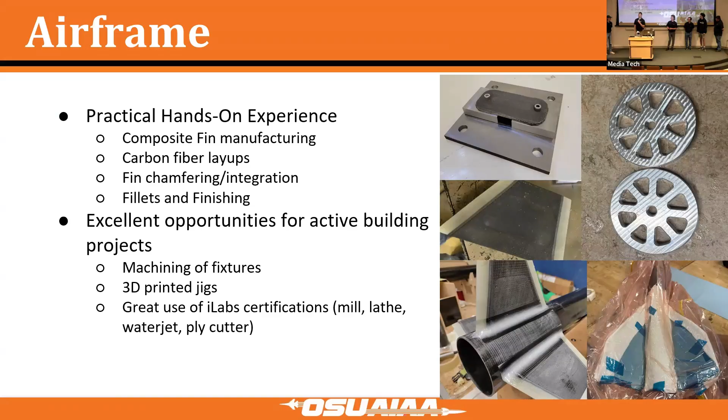Who's next - Design, Build, Fly? Perfect, all right. Our next team is Design, Build, Fly. This team focuses more on an airplane rather than a rocket.

The goal of this project is to develop an RC aircraft and fly it in an international design competition with a bunch of other schools. We are competing to achieve a certain set of objectives set forth by AIAA, the host of this competition. This year, the challenge involves creating an aircraft that can autonomously fly around a course and complete certain objectives.

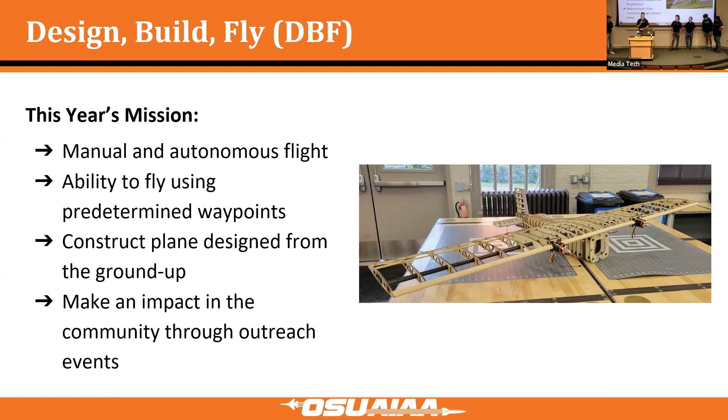The design features a mothership, which is the plane that you see here. This plane has to fly in kind of an Olympic track shaped oval. It has to do this three times and then complete a series of smaller loops. It's kind of hard to explain, but this mothership has to fly that pattern.

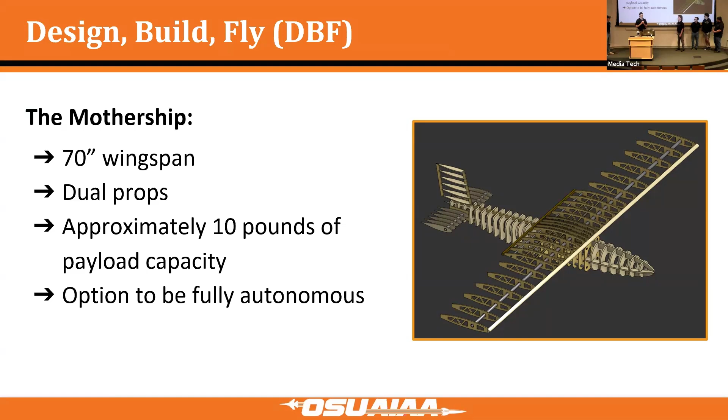Underneath it, sitting right under here, there's a mini glider - so it's a plane that deploys a glider. The plane that you see there is manually flown, but the glider has to be autonomously flown. The glider will detach from the plane and autonomously fly a predetermined route and then land on its own, and you have to land in a very specific area to get points and increase your score. I think it's a really awesome concept this year.

I think we had a video here, but it won't be playing, but you can come see afterwards. They have a video of the little glider thing autonomously landing by itself, which I thought was really cool.

All the components for this are made in-house. We use balsa wood and we design and cut the parts on a laser cutter. Then we integrate electronics into that, and then we program the plane from there. So there's a lot of manual flying that takes place because we have to train the flight computers to be able to fly the plane autonomously.

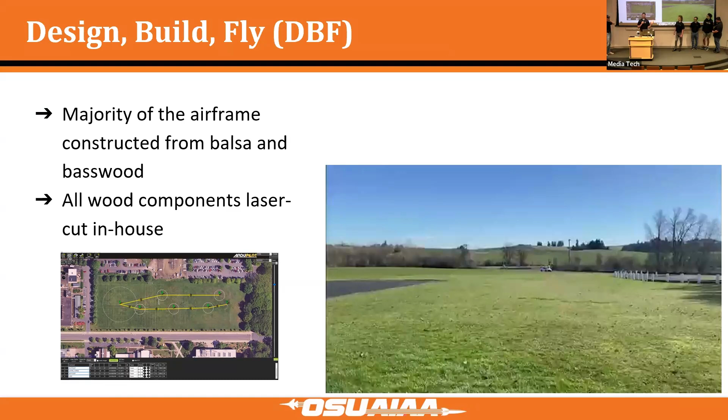I don't think they use cameras to see, but I think they use LiDAR or something like that. I'm not on the team, but they use something to be able to know where the little glider thing is. So I think that's pretty cool, but that's DBF.

Next up is the agricultural drone team. This is a really cool project. This team is also developing something that's autonomous. This drone is being developed in partnership with Raitong Organics Farm, a farm in Thailand, and the whole purpose of this project is to design a farming drone that can go out in the fields just by itself autonomously and farm. I believe it has a payload on it that is capable of carrying liquid, so it can be fertilizer, it can be water, whatever. But you can go to the next slide here.

A big part of this is making the drone repairable using off-the-shelf parts, because if you think about a farmer in a remote part of Thailand, if something on this drone breaks, they're not going to just be able to go manufacture a replacement part. They're going to have to order it online. So you have to design this drone using things that you can find online. That's a very big challenge.

Additionally, a big challenge that they haven't had time to focus on this year is how do you make all the components waterproof, because it's very rainy in this area. And additionally, the farmer is probably not going to be very technically inclined, so how do you make the user interface of the drone very friendly, so anybody can learn how to use it very simply? So these are some of the challenges the team has been faced with this year. In my opinion, I think this is one of the coolest teams that we have. But that's me. Next up, we'll pass it on to HALE.

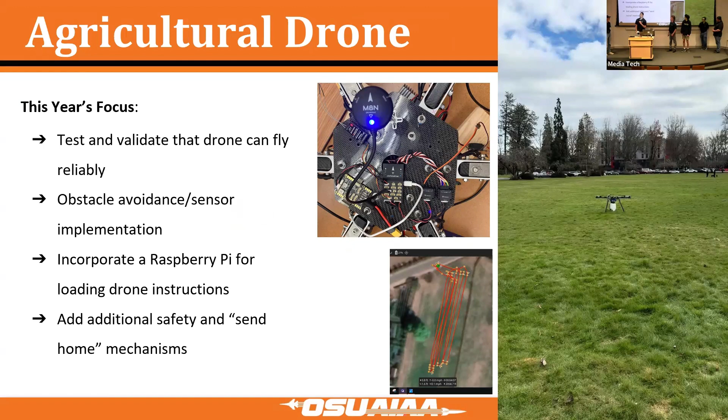Yeah, I'll take that. Okay, cool. Our video doesn't work. Dang.

Okay, so HALE is the high altitude liquid engine team. The other rocket teams you'll see during this presentation are solid rockets. What that means is the actual motor they use is a fuel grain that is like a solid mix inside that contains the propellant and oxidizer. They're both propellants, but the fuel and oxidizer are in one sort of dried compressed grain. We use liquid propellants, so this is what the Falcon rocket, the Saturn V, or big orbital class rockets use. We are a Kerolox system, that is kerosene and liquid oxygen. So we're also running cryogenic propellants, things that are causing all kinds of problems for us, but that's sort of our bag.

And so we're a little bit slower than some of these other teams. We're a sort of long-term, iterative, constant march towards getting to our ultimate goal, which is the Kármán line. That's at about 100,000, or it's about 100 kilometers. It's sort of the beginning of space for aerospace people.

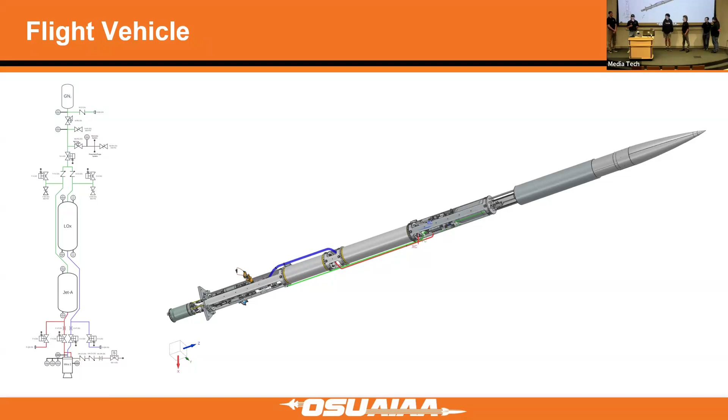Our team is not only developing our flight vehicle, but we're also developing our own ground control systems so we can enable the launch of this flight vehicle. There are two parts to this system.

When developing our engine, we have to isolate it, because propulsion research is the most important part of getting the rocket off the ground, can we actually produce thrust downward so we can go up. On the left is our horizontal test stand, a bunch of data acquisition, plumbing, and tanks that allow us to put just our engine on the stand and run controlled tests where we can light it, fire it, and characterize the engine.

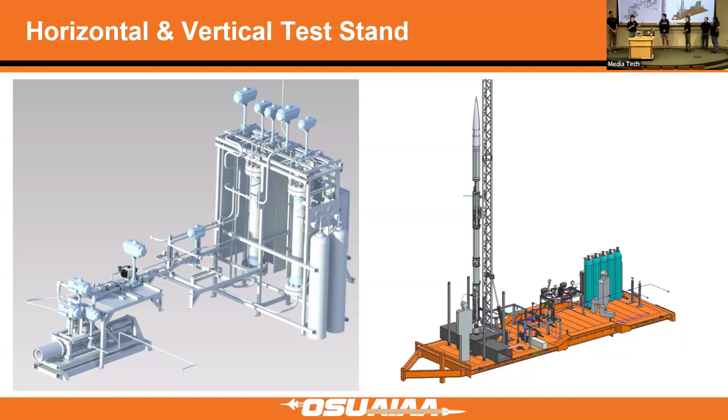For a full-scale launch with our flight vehicle, on the right is our vertical test stand, a massive 30-foot by 10-foot trailer. We take all the components from the horizontal test stand and put them on there. On top we can facilitate a large launch rail, about 50 or 60 feet, which is absolutely huge. We put our rocket on it, run the same tests, then light it and take it off, which is pretty fun.

We have some pretty cool videos of our hot fires. This is probably the most exciting part of the team, watching an engine fire. There's no experience quite like it. It's very loud, it's very bright.

Our second generation engine is our flight-capable engine that we'll actually be putting on our rocket. We fired it recently, about 3 months ago, for our first test, and we fired it at night. This is the firing video we can show you if you come outside.

And then just recently... well, I guess the video doesn't load. We also have a second static fire of that engine that's not shown here. Next slide. Oh, I see, okay, wonderful.

The main difference between these two firings is that the first one was the first time we ever fired the second generation engine. Fun fact: this engine is the second college-developed bipropellant liquid rocket engine ever developed in the state of Oregon, and the first was also ours.

Our first generation engine, we brought it along with us today, so if you're interested, we have it with us. It's pretty cool. This second video was the second firing.

As he set up for me, we designed Mira 1 and Mira 2, our two engines. Mira 1 you can go out and see, it's really big and bulky, weighs like 50 pounds, stainless steel. We mainly built that so we could get something in the stand and start characterizing and building up the infrastructure around running our engines. But it's difficult to integrate an engine like that into a flight vehicle.

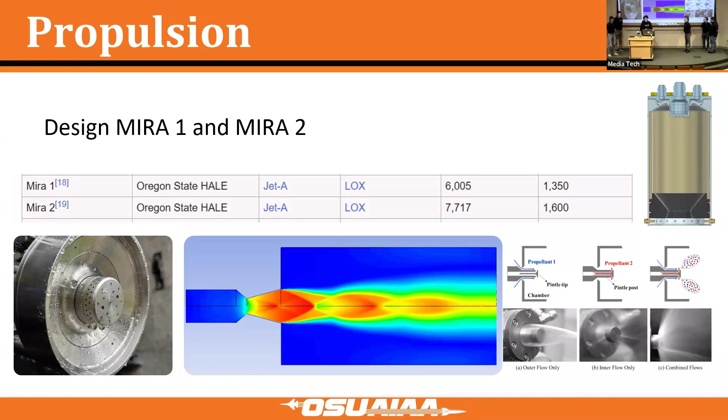These are Mach diamonds. So when you get supersonic flow, there's all kinds of weird things that occur. But yes, that's propulsion.

So in addition to the propulsion team, which is sort of our main driving force since the whole thing is we're doing liquid rocketry, if we actually want to put an engine together and send it up to the sky, we have to have a bunch of other sub-teams building a bunch of other infrastructure. We have 5 other sub-teams on the team, and we're going to run through these real quick so we don't burn too much time.

First up is our vertical test stand, which I already talked a little bit about. That's going to be our 30-foot by 10-foot launch trailer. We're actually going to drive this thing down I-5 all the way to the Mojave Desert east of LA. The main purpose of this is to facilitate the fueling, launch, and safe launch procedures of our flight vehicle when we actually put it on. The main work that goes into this is a lot of machining, manufacturing, and fluids work. We have to understand how we get a fluid from point A to point B, how we do that safely, and then, as I'll talk about with avionics in a sec, how we know if we're doing it safely using data acquisition systems, sensors, and such, as well as for the final launch in the Mojave Desert.

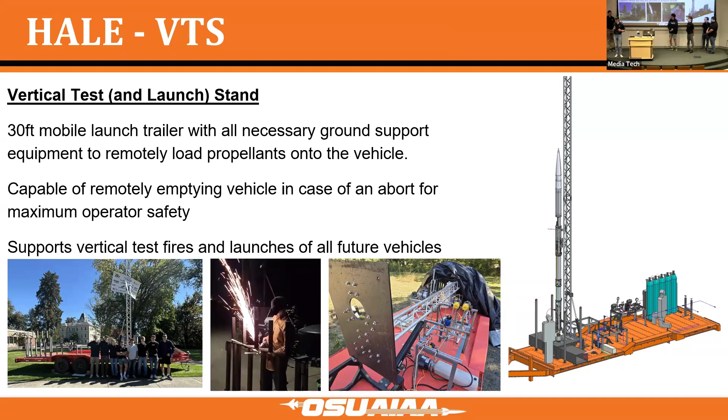Before we go all the way out there and cross our fingers and send it up, we're going to do a lot of tests. We're engineers, so we have to make sure it works before we actually get there. That's where the vertical test stand comes in, that's why we don't just call it a mobile launch trailer. This facilitates a lot of tests, both pressure, fluids, electronics, and of the engine before we ever get down there to a launch, so we can validate that system.

Another thing that comes with having those liquid energetic fluids is we need to have basically a whole fluids team in the actual vehicle to deliver all these things to where they need to go. So in between that pressurant tank and the engine, there's a liquid oxygen tank and a fuel tank. All of those tanks need to have valves and releases and escapes, so that anytime there might be a failure in the system, we can either vent it to a safe area or prevent a catastrophic destruction of the whole system, because there are areas that can see very, very high pressures and areas that need to see much lower pressures.

And then add on top of that, all of these systems being actuated are all pneumatics. So we're also driving all of the opening and closing of the valves with that same pressure that we're using to press all of the fluids through the system. So you sort of get into a chicken and egg, where you need the pressure in order to get all the valves open to get the rocket going, which you need for all of your valves and systems to be running and all your data to be collecting, but that's what we do.

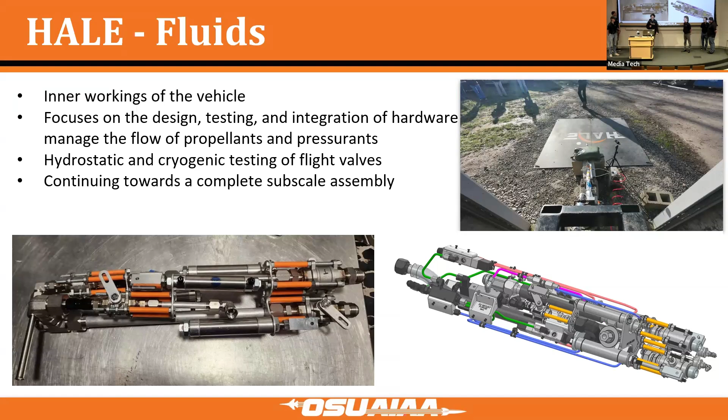And so that's sort of what fluids is: getting all those inner workings and cryogenic handling issues through a bunch of valves and tap offs and things.

And structures, very similar to the other rocket teams with a few key differences. You can see our bulkheads are a little bit bigger, a little bit beefier. We're carrying these big heavy tanks, and we have a big heavy rocket, and we make up for that with a very strong, powerful engine.

But so these are like a bunch of intersections. There's a bunch of things for a V-bay, and our design has carbon fiber flight skin, but the actual structure is mostly aluminum. And so we're sort of building it a little bit robustly and heavy the first time and just trying to get something off the ground.

Liquid's very difficult. There haven't even been that many launches in the whole US in liquids. So that's sort of a little bit safer of a design philosophy there.

But still, we have a lot of interesting things going on. We have to worry a lot more about accessibility. So when the actual rocket is stacked, being able to mess around with all of those valves and fittings and make sure everything is sealed up is of key importance, because if you have one leak in the system, that can be really bad. And when you have hundreds of connections in the system, you're going to have some leaks.

So we have these big channels and areas cut out of the structure so that we can potentially get in there and eventually fix and mess with things, because it's not always going to be that everything turns on and seals the first time. So a few other little things like that, but some other considerations.

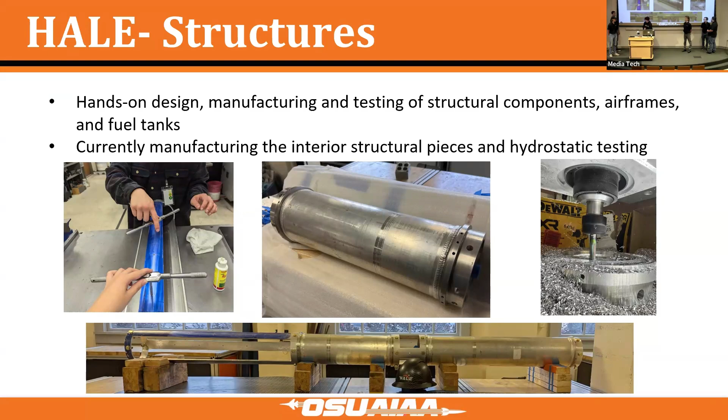We need to do a dual deploy. Essentially, if you deployed our big, huge parachute up at the altitude where we would want to deploy it, we would drift really far. And so we need to have a little teeny tiny parachute that starts first so that we're falling much quicker, and then the larger parachute deploys.

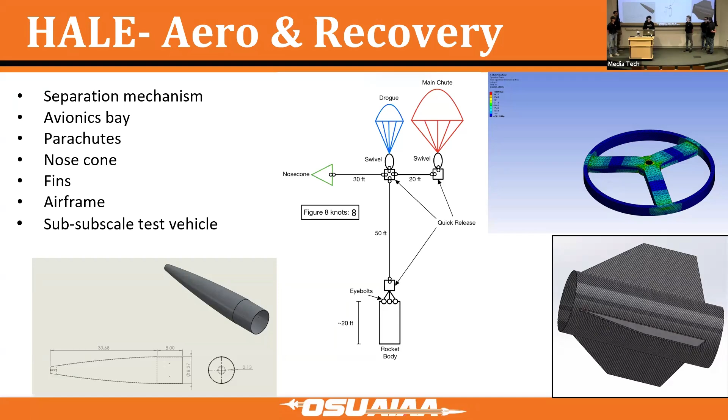So for dual deploy, we have to reuse the high pressure gas in another place. They typically use a pyrotechnic charge to separate and kick things off. We actually have that high pressure gas tap off into a little piston, and the piston punches off the nose cone. So some other considerations around that, and the fin can layup is mostly the same thing. We've combined a lot of that.

And then avionics. All right, and so this is the final sub team. This is the work I do. So if anyone's interested in electronics, I love talking about this stuff. I'll make this quick because we're running a little long.

So avionics is all about doing the data acquisition and control of the rocket. We cannot stand next to this and turn all the knobs and look at all the gauges and feel good about our safety because we're next to very high pressure fluids and very dangerous and explosive fluids. So when we have to launch a rocket, at minimum, we're going to be 400 feet away in a subterranean bunker, just barely looking through some very thick plexiglass with some ballistic covers over on top of us.

So avionics is all about tapping the pressure and temperature off the system, as well as actuating solenoids and doing real world error checking with limit switches to know whether or not that solenoid turned to open or close a valve. So what I mean by that is there's a lever arm on that valve that's going to move physically, and we have a little button right here and there to know if it actually made it there in the real world.

So we've had problems with that, and that's very important to make a safe system. Everything or most of everything we do is in-house design. We're a bunch of electrical, computer science and mechanical engineers, and we love this stuff. We try to design systems where we can, but we're not trying to reinvent the wheel.

Where we can take off-the-shelf solutions, we go for that. All of this work combined, we're hoping to launch our subscale vehicle this summer. It's a 20-foot rocket, which is crazy because it's our subscale rocket, and we're aiming for a 30,000 feet altitude. That's Hale. I'm going to pass it off back to Braden for APOP.

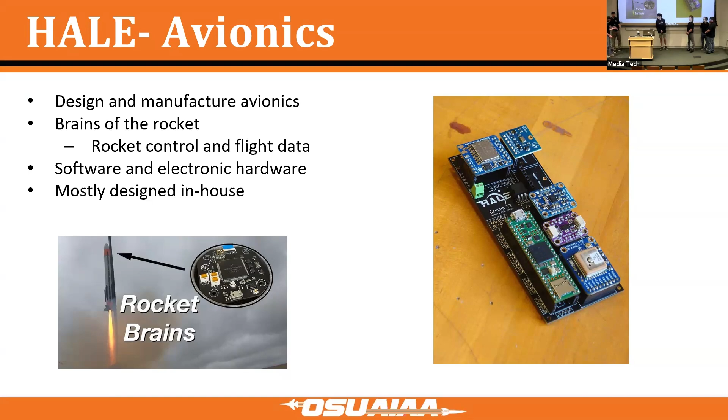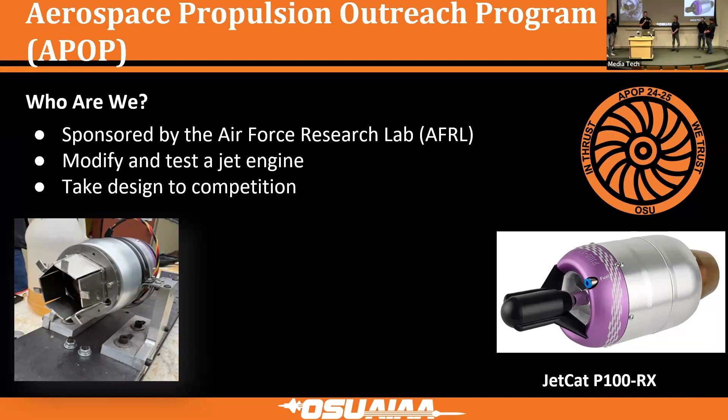So APOP is our Aerospace Propulsion Outreach Program team. This is a design competition, national, sponsored by the Air Force, in which the team is given a JetCat engine, you can see in the bottom right there, and they have to do something to it. So this year, the team is focused on creating a nozzle, which you can see a very preliminary draft of right here, that is capable of throttling to adjust the amount of thrust that the engine produces.

So you can see sort of iterations here. Over on the right is their initial design concept when it's closed, so that's when you would be generating the least amount of thrust. When you go over to the middle and the little flaps right here open up, you can throttle the thrust to produce more, and then you can actually see the fully prototype model right here.

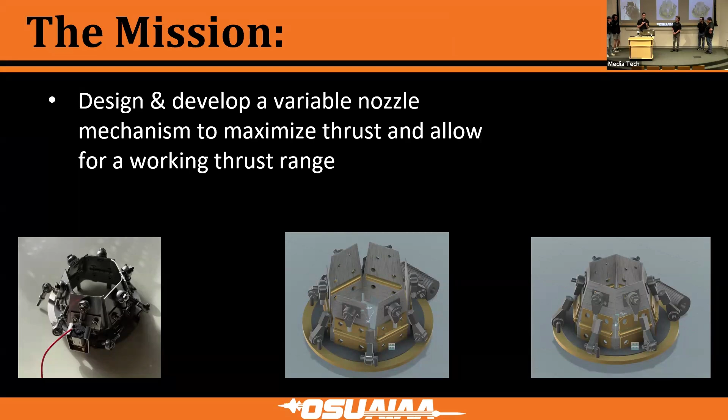So we go and we compete with a bunch of other schools at, I forget the name of the Air Force Base in Ohio, but that's where it is. And I forget the exact metrics, but I think you have to design this so that it can precisely throttle to about 80% of what the normal nominal thrust would be from the engine. So that's sort of the objectives there.

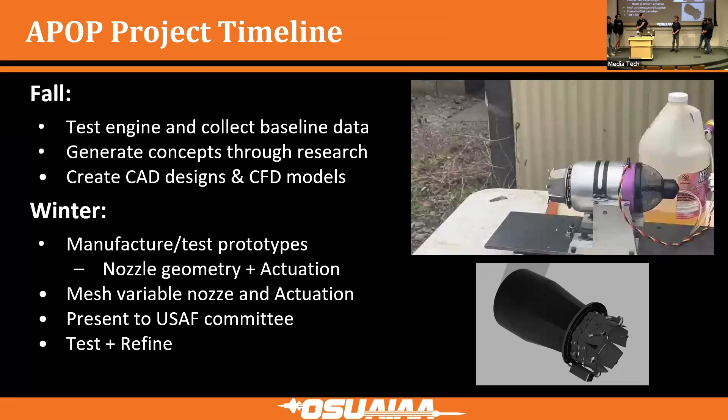We had a video to play, but you can see sort of what it looks like on the engine up there in the top right. Again, that's an early design though. And if you want to see the video of that thing working in action, you can come see it after.

Next up is our solar airplane team. This is a research team that is aiming to, oh wait, you want to talk about this? I can take it. Yeah, you talk about this. Okay. Yeah. He's actually on the team, so.

Yeah, so Solar Plane is our other plane team. We got two: DBF is the first, Solar Plane's the second. Whereas DBF is a competition team, Solar Plane is a research team.

And what they're researching is the idea of pseudo satellites. So right now, if we want to put something up in the air and keep it up there, we have to put it in low Earth orbit. And that takes a lot of energy, that takes rocket science, and that's very complicated and very hard, to be quite frank.

And so the solar plane concept is, what if we could launch a plane and it's light enough and efficient enough and it has solar panels on it that we could send it up and it'll be able to power and recharge itself theoretically infinitely. So now you don't have to use all this energy to put something in orbit, but you still have the same characteristics of something up in the air that you could use for anything like broadband or GPS, the same functions we use for satellites today.

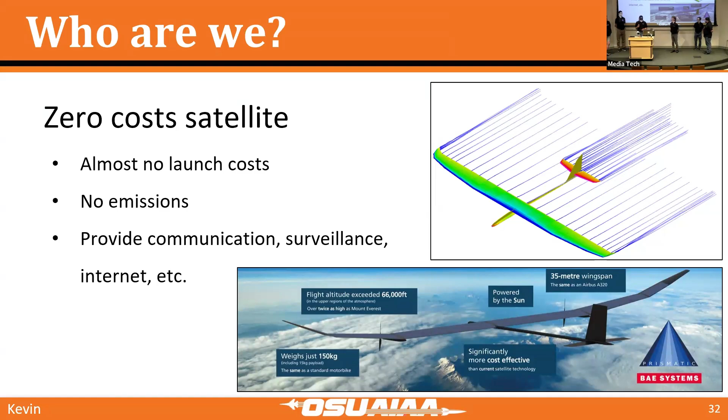The main objectives of this one: you're going to have almost no launch costs, no emissions, you can provide communication, surveillance, internet, etc. The team this year is taking an off-the-shelf RC glider, and they're upgrading it with all these solar panels and solar plane technology like electric motors in order to meet this goal.

So last year's team, they got a 2-hour flight time in with a single boom or a single fuselage. What I mean by that is, if we look here, this is just one fuselage of the plane. So this year, the team, they were experiencing a lot of wing bending problems where when they're producing all the lift across the wing, it starts creating this kind of V force on the wings, and it creates kind of like a snapping moment right in the middle.

And that's not very good as far as if you want to create a safe plane to put up. And so they're making 2 booms this time to sort of distribute that weight load and make it a lot safer.

On top of that, they are aiming to carry significant payload, about 10% of the airplane's mass, between these two booms. They actually just had their first flight, and it was a pretty cool flight. For the first flight, they put a camera on as their payload. We have that video and can show it to you if you come meet us in the lobby.

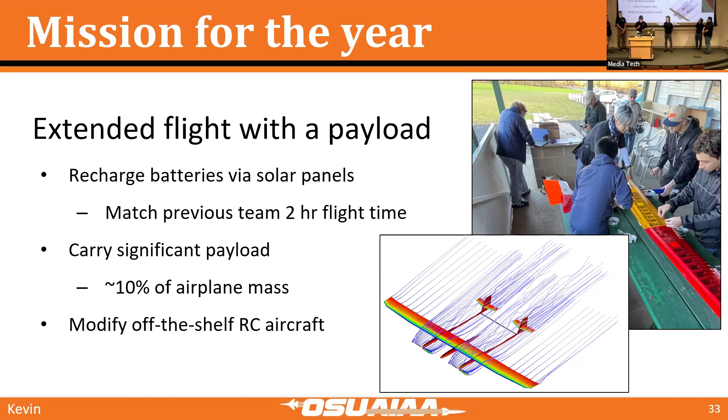It's pretty cool, we have a drone chasing it in this case. By the way, the scale of this thing, I think they're rocking about 12 feet. It's absolutely huge. So if we put it on this stage, it's gonna be very nearly reaching across this stage. The purpose behind that is, as you extend the length of an airplane's wing for the same width, you get a higher wing aspect ratio, which gives more efficient characteristics from the plane.

It's pretty cool. And pass it off back to Brayden.

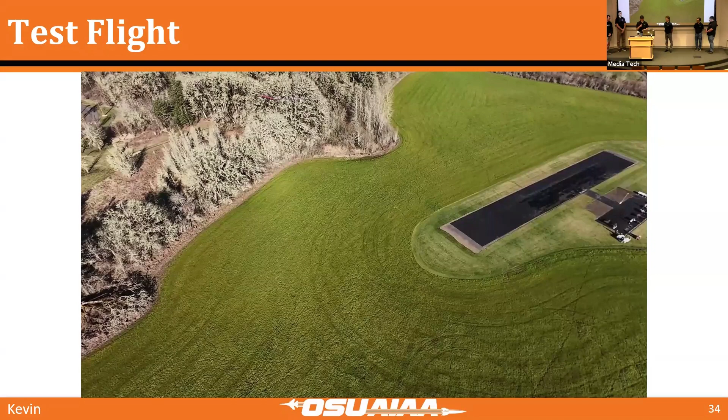Lastly is our student competition rocketry team, our 3rd rocketry team. We are again a solid team, and unique because unlike all the teams you've been hearing from, which are majority led by senior design capstone students, this team is primarily led by underclassmen volunteers. We are also a competition team, so we compete in an international design challenge with other schools down in New Mexico. We have a payload in this rocket, which we'll talk about soon. This rocket has the basic subsystems, structures, avionics, and recovery you've heard about from other teams, so we won't cover that, but we will cover the payload and an additional aspect that makes it unique.

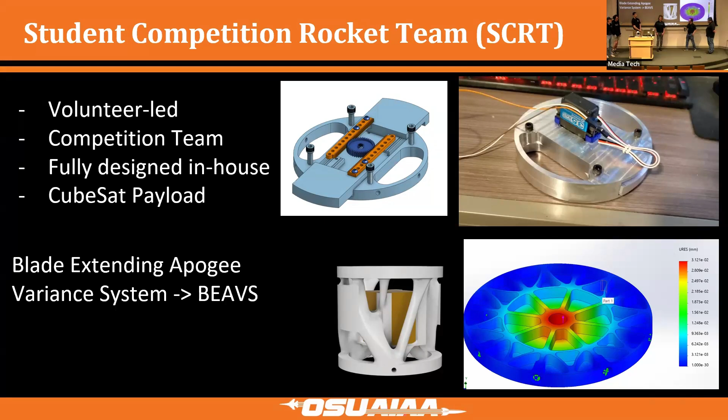Yeah, the video's up there playing. It's really cool in action, so you can come check it out afterwards.

The payload, on the other hand, is the Planetary Exploration Mapping and Data Analysis System, or PEMDAS. The goal of this is pretty cool. It's a CubeSat payload that replicates what you would send to a potentially habitable planet to determine its potential for human life. The idea is you send our rocket to a planet and deploy this payload, and on the way down, while the rocket is descending, the payload collects a lot of atmospheric data and data about the environment. There's a camera on it that takes pictures of the ground and uses photo meshing to determine optimal landing sites for future human crewed missions.

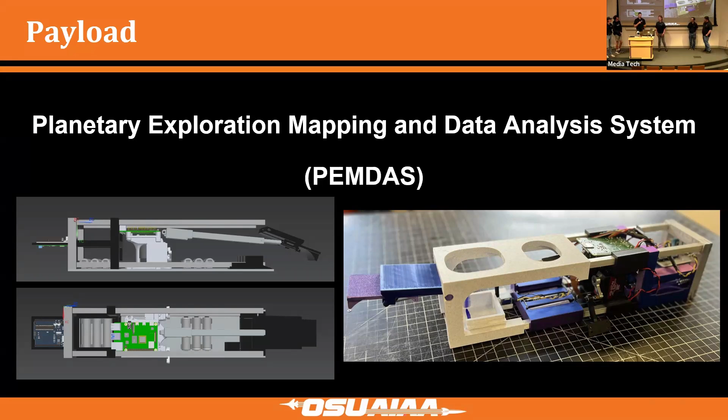Once the payload actually lands, there is a soil sampler, which you can see right here. It's got this little double door thing that'll open up and, like Hungry Hippo style, scoop dirt in, and then it will analyze that dirt. It will mix it with a water sample, and we can determine the material composition of the soil. There's a lot of really cool things this payload can do, and that's what makes our team unique.

Now, that's it for all the AIAA teams, that's all of our teams. I'll pass it on to Ryan now to talk a little bit about what he does. Okay, cool.

Or fusion propulsion, or trying to do something like a fusion. Oh, it's not on there. Do I have it? Yeah, there we go. It'll be on the next one.

Or fusion. That's sort of the environment that we inhabit, and so we have this umbrella within OSU. We do stuff with the College of Science and Engineering and some others, so we're basically developing advanced materials to exist in these plasma-rich environments. We're funded through some government programs, and that's that.

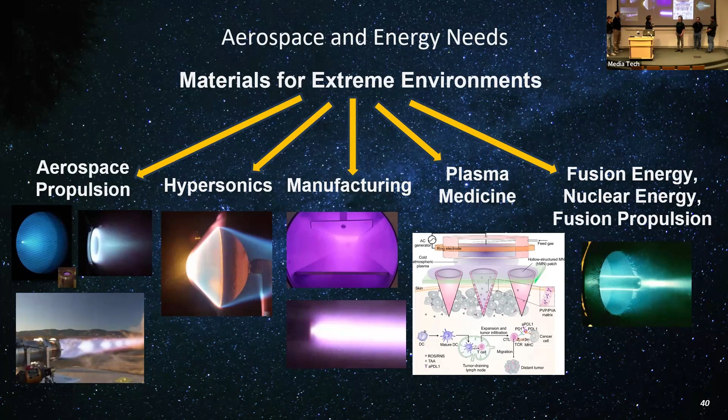We frequently make materials that survive temperatures at the surface of the sun. We're working on doing temperatures at the core of the sun. We are pretty crazy with what we build materials for.

So all of that is seated within these programs and capabilities that we have at OSU. We have advanced manufacturing techniques, and we make graded and tailored alloys, which is essentially making alloys out of all kinds of different exotic metals and ceramics, using additive manufacturing techniques like laser powder bed fusion, direct energy deposition, binder jet, and some other things.

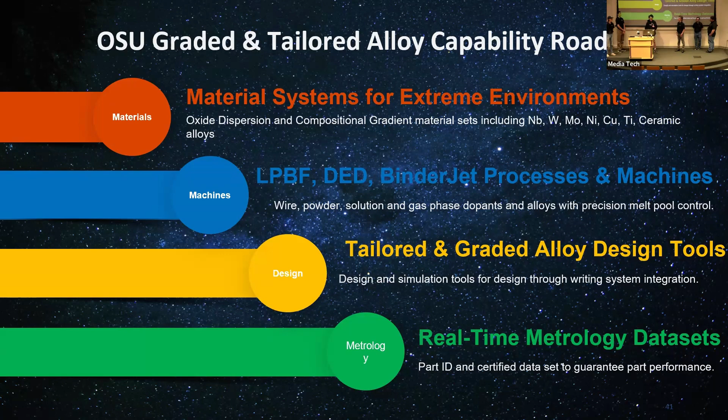We're close to the HP campus in ATAMI, so we utilize those resources. We're also developing tools, data sets, AI, and a lot of analysis for creating these new and exotic materials. That whole thing is AMMEA, Advanced Materials and Manufacturing for Energy and Aerospace.

We partner with businesses like HP and large aerospace providers, as well as academia and national laboratories, knitting all of those things together from their interests and experience to their resources, in order to make some of the craziest materials in the world, definitely in Oregon.

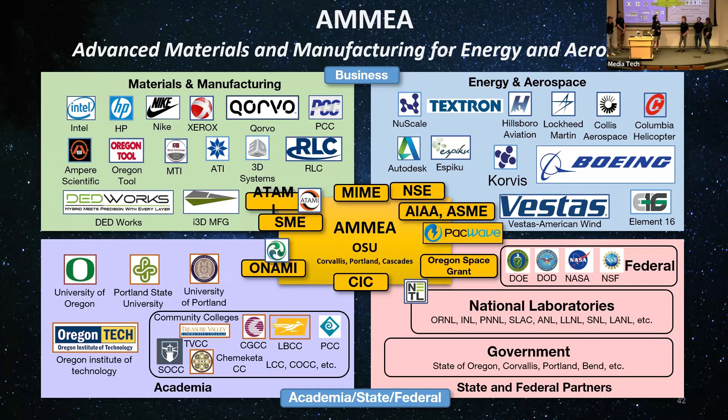We had a lot of older companies that were already in this area, so we have a lot of connections with people who made titaniums and castings and things. We have a lot of spin-out companies that have been developing that stuff, and that's not easy to just whip up out of nowhere. So for now and for the foreseeable future, we're going to have a pretty good advantage in materials that we're looking to exploit.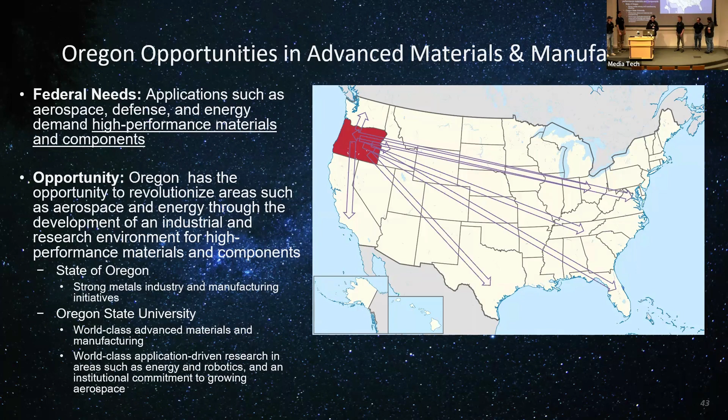Showing that OSU is doubling down on this, we are building a new laboratory: the Collaborative Aerospace Research Center at OSU within the Nancy Squires Aerospace Laboratory, which is actually where Hale and some of the other teams conduct their experiments.

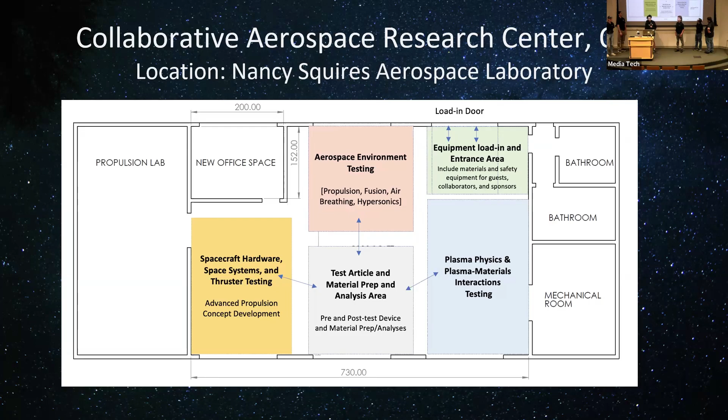This is just a little floor plan thing we have developed, and we have a couple nice photos showing what it might look like. These are all vacuum chambers.

We have to mimic the space environment when we are testing our advanced propulsion things. So you'd be like, how could you fire a rocket engine inside one of these things? Pretty much that's kind of what we're going with. Luckily, we don't have to deal with as much thrust — the advanced propulsion stuff that we make usually has thrust about like a sheet of paper, but it's like 10 times more fuel efficient than those engines.

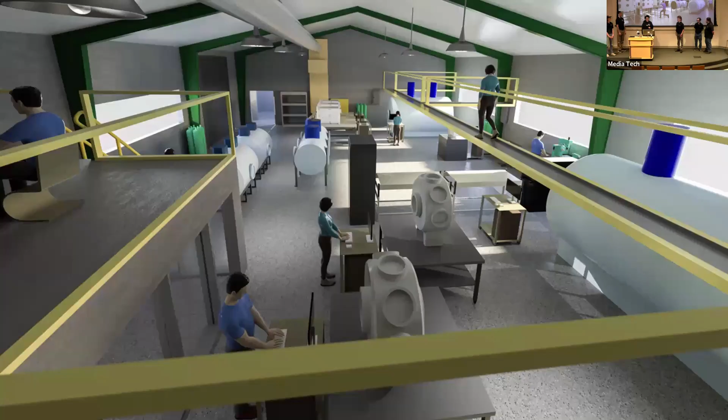So as long as you're already in orbit, if you're a spacecraft and can burn for a long time, it works out to be much more efficient. We can actually test those propulsion systems inside of these chambers. Here's another little image of that.

We are continuously trying to develop an Oregon space identity and the capabilities around that identity, using those material strengths that already exist here. We're growing the community at all different levels, including within AIAA, which is why it's important to come do these kinds of outreach events and get more people interested and show everything.

We're just trying to keep improving research, keep investing in these areas, and engage everyone, getting everybody ready so that from K-12 all the way to me, a grad student working on a PhD, we have people who are ready to do these things. So there we go — that's graduate studies within the WERS lab.